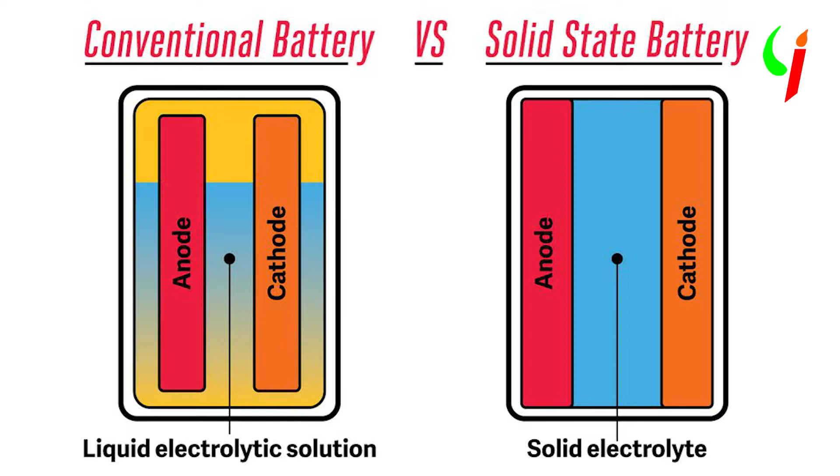Moving on, Toyota actually remains on track to implement their solid state batteries in the electric vehicles that they're going to manufacture by 2025. So what are solid state batteries? In the current lithium ion technology that we use, there's a liquid electrolyte. So you replace that using a solid electrolyte, and that's how it is coined as a solid state battery. According to experts, this is a very good move, and you could actually achieve higher range without having to compromise on the size of the battery pack.

Also, Toyota's prototype cells are sulfide based in the electrolyte. So it is a very challenging part to make these cells since you have to have an ultra dry environment around you. But I think the payoff is great enough since Volkswagen is investing in such technology itself and has a similar deadline around 2025 to roll such cars out. They have partnered with this startup called QuantumScape, which is working in this current field of making solid electrolyte type cells. So it's a good move. I think it will be more challenging for other automakers if this works out for both Toyota and Volkswagen.

So we'll be starting off with the mechanical subsystems of the car. We'll take you through some of the points. In these points, we'll be discussing how the actual process works in designing, manufacturing, and all other mechanical parts of the car. And then once you are done with that, you get a final proper structure of the car. So we start off with the first point, that is the design.

In design, basically we start off with drawing or rendering, in which the ideas in the designer's mind and the team's mind are actually put onto pen and paper, and then further they are done in a similar way on the CAD softwares. Now, before moving on to the CAD softwares, you need to ensure that your designs and your geometrical models or calculations are well under the rules and regulations, and the constituent of all these geometrical calculations and summation is called a package.

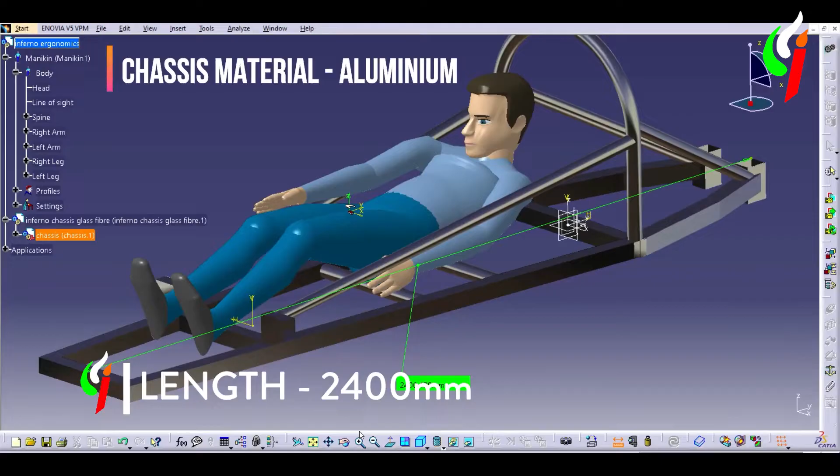Now, once we are done with this stage, we move on to the shelf engineering or the pre-engineering stage, where more ideas are put into place before finalizing the design. The design is put into the CAD and the CAE softwares. Different types of analyses are done, and these are validated experimentally. Now you can add ideas or other points into this, and you get to know what the problems are. Also, you can use these ideas for further models if they cannot be implemented right now. So that is the pre-engineering stage.

After this, the designs are finalized. They go through multiple software tests because we are not a manufacturer, so we cannot have physical tests or any wind tunnel tests. So we need to have all of these tests on the basis of the software. Multiple conditions are put onto it, and then the final design is approved by the design head and the team. Then we move on to the fabrication part.

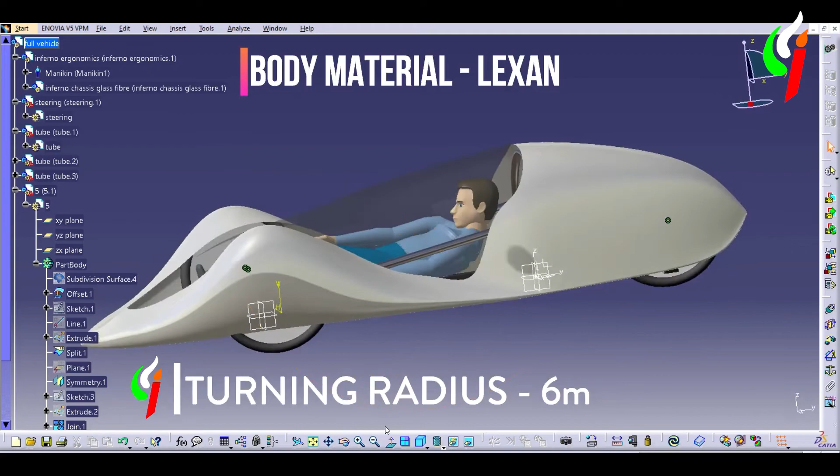Once we get into the fabrication, after we have completed the design checks, the modeling and the analysis, what does fabrication do? Fabrication in the truest essence is a very simple process. So, what is the definition of fabrication? It is the entire process of building machines and structures from raw metal materials.

So when you're using a raw material, you make sure that it undergoes cutting, forming, bending, welding, and once all of these processes or many more are performed on the material, it is assembled to make sure that the final product is achieved.

So what is the difference between a fabricated and a non-fabricated product? If you look at a product and you have to decide whether it is fabricated or non-fabricated, there's a fundamental difference between them. If a product is made of ready-made materials and it's just assembled, then that is not a fabricated product.

But if a product is being manufactured using a raw material and probably all the processes that I mentioned earlier and even more, maybe using the lathe or the milling machine, welding, casting or other fabrication techniques, then the end product achieved using these entire processes is called a fabricated product.

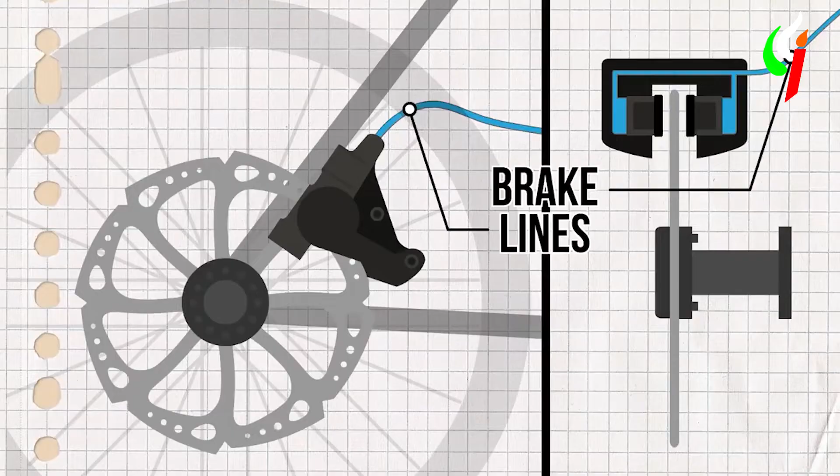Now, for the cycle tires, we have braking systems similar to cycles, that is the rim brakes, which are sort of V, and which can be used to clamp the rim and stop the speeding vehicle, or we can use the hydraulic brakes, which are more efficient. So in our case, we use the hydraulic brakes since they hold the disc better, and on the uphill or on the downhill, they are much more efficient than the V brakes. Since we have to do that testing on the ramp before passing the technical inspection, we use the hydraulic brakes.

Then we move on to the steering mechanism of the vehicle. So, what is a steering mechanism? A steering mechanism, like any other mechanism, is a simple mechanism. But what is its purpose? What it does is it converts the rotary motion of a steering system to the swiveling motion of the vehicle's wheels, to be precise. And as you know, if you're talking about an automobile which has four wheels, you will see that all four wheels have to turn at different angles. That's pretty obvious because all of them are turning at different radii themselves.

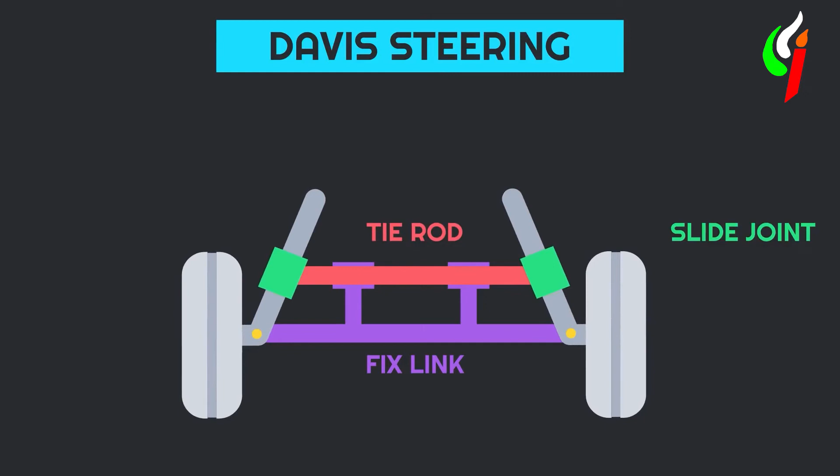And when you're talking about steering mechanisms, there are two mechanisms that come to anyone's mind. One is the Davis mechanism, and the other is the Ackermann mechanism. So, talking about the Davis mechanism, it is a mechanism in which the entire mechanism is placed in front of the axle of the wheel. And also, if you notice, this has more sliding pairs than turning pairs. And due to this reason, there's also more friction due to the wear and tear. And this leads to inaccuracy of this mechanism over a very short period of time.

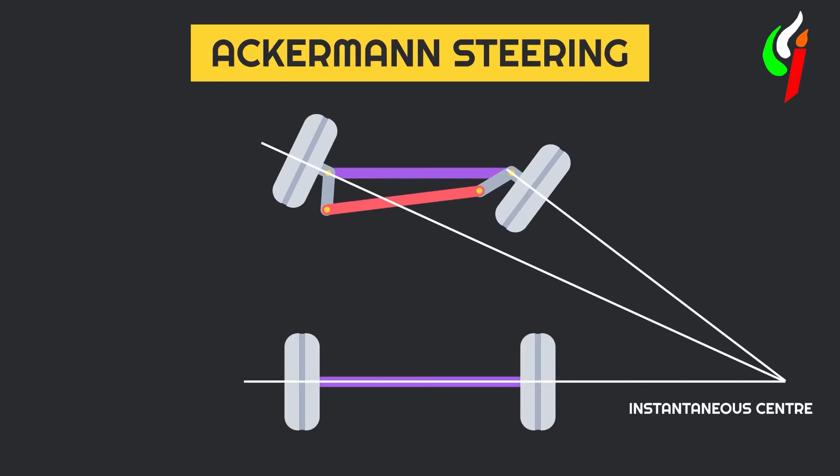But that is not the case when we come to the Ackermann steering mechanism. This Ackermann steering mechanism is in complete contrast to the Davis mechanism. In this Ackermann steering mechanism, the entire mechanism is placed behind the axle of the wheel, and also it has more turning pairs than sliding pairs. So for that reason, there's less friction wear, and it's durable for longer durations. And that is one reason, along with the simplicity in its construction, that the Ackermann steering mechanism has been used widely throughout the world.

And in the past 1 minute, you guys would have heard that I've used the word Ackermann a lot. I'm pretty sure you would have found it very familiar. Just to clear the air around it, this Ackermann mechanism was actually a part of our syllabus in the fourth semester in the kinematics of machines subject. And like all of us, even we gave it a miss just because it came as the odd question of the question paper. And not until we started actually working on the car did we know the importance of Ackermann, and we actually had to get back those textbooks and run through what the mechanism actually is.

So that's one thing that all of us are guilty of, but I think it's pretty fine. I mean, everyone does that, so did we. All of us would admit to making that mistake.